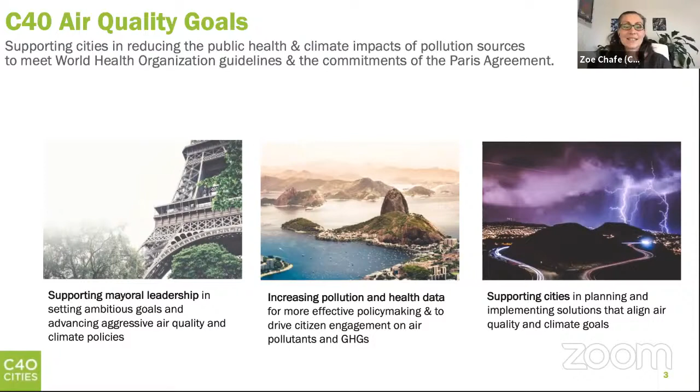I won't have time to go through all the details, but fundamental to signing this declaration is the commitment to establishing air quality goals and meeting WHO air quality guidelines. We think one of the most important ways to do that is to identify the top sources of air pollution, develop control strategies, and use that to implement policies and programs. We've set a deadline of 2025 for the first evidence of doing that within our signatory cities. Then finally, to track and report publicly on progress towards meeting these goals.

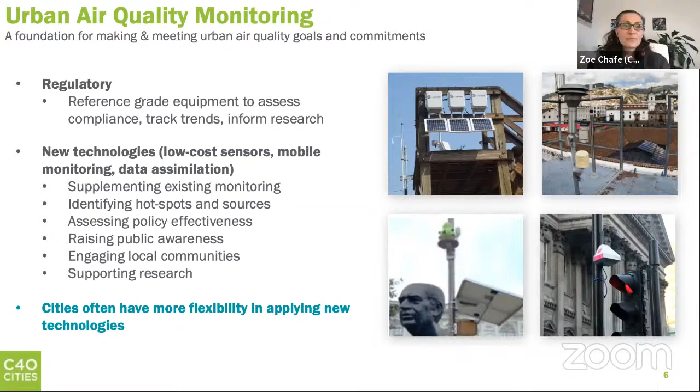I think that second category is the really exciting one right now, especially because we think cities often have more flexibility to apply these new technologies than other agencies or government groupings might. So what I'm going to do in the next few minutes is briefly present 4 different case studies of how cities are using these different types of monitoring techniques.

The first is a project called Breathe London, and the objective of this campaign was to collect really high resolution air quality monitoring data that can be used for policy development and evaluation. They used a combination of mobile monitoring, fixed site monitors, and personal monitors. That information is being used to inform the expansion of an ultra low emission zone in central London and to fulfill a mayoral commitment to increase local pollution monitoring.

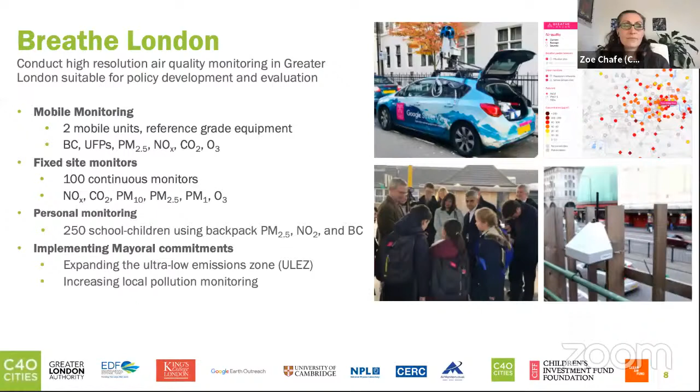The second project I want to highlight comes from Los Angeles, which is the Watts Rising Air Quality Monitoring Network. This is a unique partnership between the City of Los Angeles and community groups to create a hyperlocal air quality monitoring program in a historically underserved and overburdened community. It's using dense sensor deployments, somewhat like Breathe London, to advance community interest in hyperlocal air quality.

It's using some new low to mid cost sensor technology to provide insights really at a block by block level, something that regulatory monitors are just not equipped or designed to do. It's important to note that this program is really driven by community desire. The Watts community identified a need to deepen the community's understanding of local air quality, and the community group's feedback informed where the sensors would be placed. So this is an exciting new initiative.

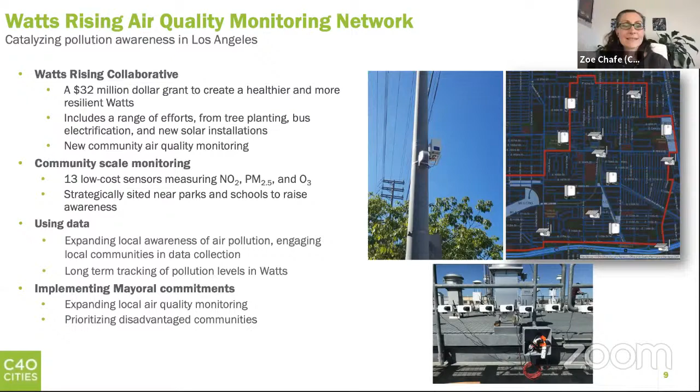The third example I want to highlight is from Quezon City in the Philippines. At C40, we're in the midst of a technical assistance program with Quezon City to help the city create a city-led air quality monitoring strategy. We're working with Clean Air Asia to implement part of what the city committed to in the Clean Air Cities Declaration, to establish a baseline of their air pollution levels. After the strategy is put together, the next step will be to deploy low-cost sensor networks to assess baseline levels and hotspots, which will then help the city take more effective action to mitigate those sources.

The last example is Copenhagen, where they've participated in a project to map black carbon and ultrafine particle pollution to identify hotspots and sources. This also supports the city's commitments under the Clean Air Cities Declaration, to electrify several modes of transport, to expand its low emission zone, and also to potentially introduce a zero emission zone. Data from this project can assist in evaluating intra-city trends, especially near vulnerable populations such as schools, daycares, and parks, and the city can use that information to inform its urban design policy.

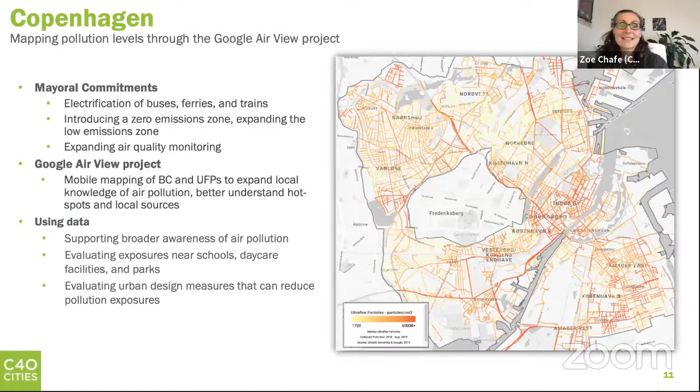So in summary, I think we see that air quality monitoring is a foundational piece of the way that we at C40 think about city commitments to creating better air quality and cleaner air. And with these new types of technology coming online now, cities have many tools available to support local action and also to assess their success in taking action. These types of technology are being applied across C40 cities to evaluate intra-city trends, identify hotspots, and then figure out what to do about them.

Important decisions in cities can be driven by data, and we see that partnerships are really important to pushing that forward, and that community engagement can both help design and also be encouraged by participation in these air quality monitoring projects. So with that, I will say thank you, and I am looking forward to your questions after the rest of the presentations.

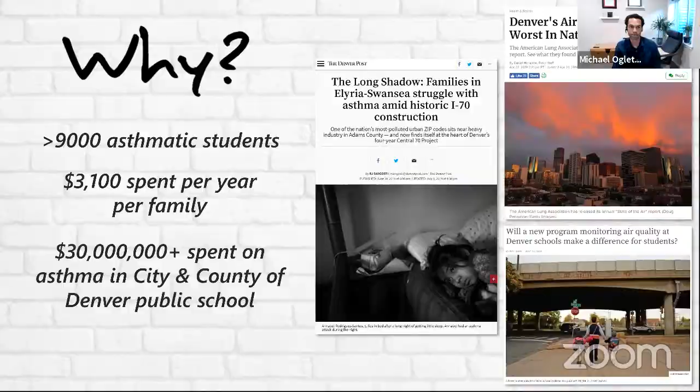So what we built was the Love My Air program. It was built around this why, and it was built in collaboration with communities. As we were thinking through how do we solve this problem of communities having access to data and using that data to better inform their decision making.

We had iterative focus groups with parents, teachers, and nurses to figure out how we solve this problem. What we came up with was deployment of an air sensor network at schools, coupled with a data platform to bring in the data from the entire network in one place, as well as reference instrumentation to correct that data and make it more accurate. Then, more importantly, we work with those schools to come up with strategies for mitigation of pollution.

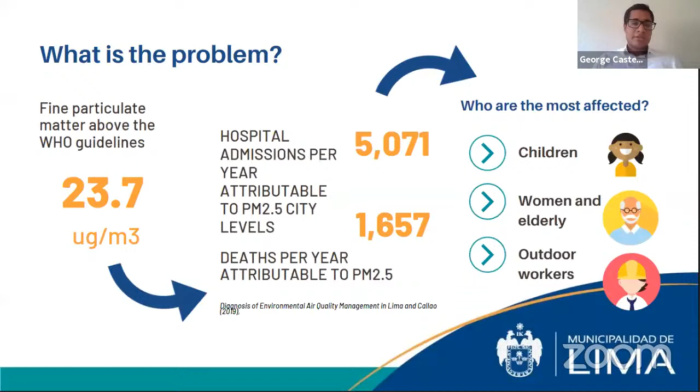The hospital admissions per year attributable to PM 2.5 city levels are more than 5,000. The deaths per year attributable to PM 2.5 are above 1,600. So the most affected people by the level of pollution here in Lima are children, women, the elderly, and also the outdoor workers such as construction workers, public cleaners, and others.

Another problem is the number of stations that measure the air quality in Lima. We have 43 districts here in Lima, but only 10 of them have reference stations that evaluate the air quality.

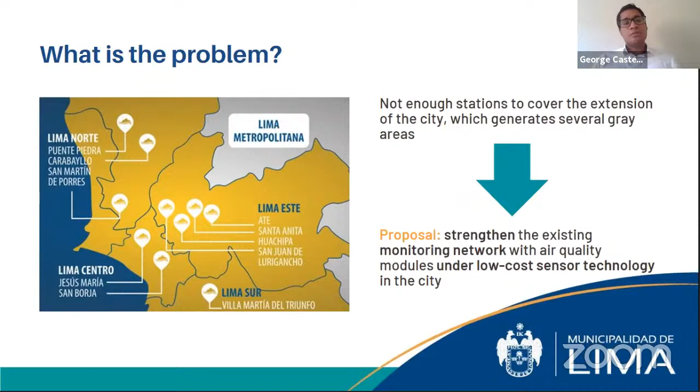So what we propose is to strengthen, to complement the existing monitoring network using these air quality modules that use low-cost sensor technology in the city. This technology is 50 times cheaper than a reference station.

This network is composed of 3 stages. The first one is an interinstitutional agreement with a startup called Qaira. This startup works with a university. We have an agreement with them in order to loan 10 of these low-cost sensor modules to put in different parts of the center of Lima. This is just a loan for 6 months. We just retired these 10 modules from Lima last December.

The second stage is with the help of C40, a climate leadership group that works with us as part of a program in which we acquire 10 more modules to deploy in the city. We are currently implementing these 10 modules around Lima City in order to put them in green areas, in the districts that don't have these models.

The third stage is financed by the IOARR project. This is financing from our municipality in order to acquire 20 more modules: 10 to replace the models from the first stage, and 10 more to complement the second stage. So I think by April of this year, we're going to have 30 of these modules around Lima.

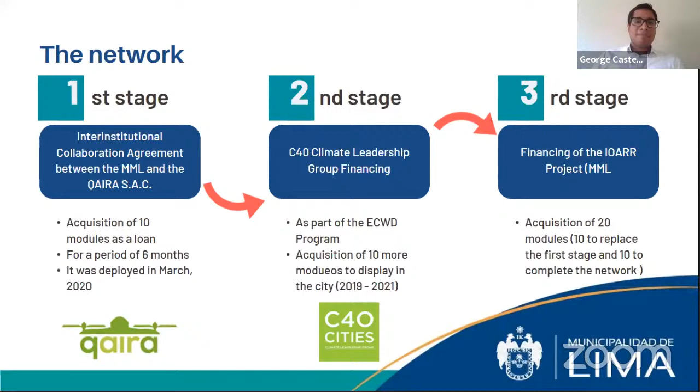We measure ozone and hydrogen sulfide. Additionally, we measure sound and meteorological parameters like humidity and temperature. We also measure UV radiation and pressure.

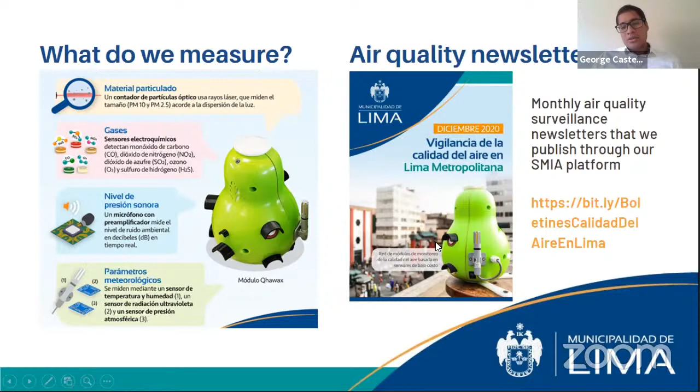Each month, we process the information and prepare newsletters to evaluate how good or bad the air quality was in the previous month. You can access this free information through this link to learn more about air quality.

So the topic is the challenges. One of the first challenges our network faced is how well the sensor performs in front of a reference station. With the help of the Ministry of Health here in Peru, we put 10 of these sensors just in front of a reference station to know how good or bad the performance of this sensor is. Currently, our national protocol for air quality prepared by the Ministry of Environment in Peru doesn't have a guideline or procedure to evaluate the performance of low-cost sensors.

So here in the municipality we prepared a document, a guideline for evaluating the field performance of this low-cost sensor. We received input from the US government, the EPA, the Pan American Health Organization, the South Coast Air Quality Management District, and other institutions. We prepared this document and use it to evaluate this sensor.

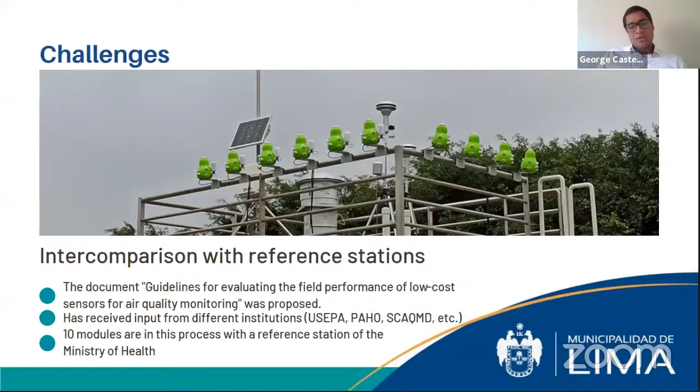So 10 of these modules are in this process with the reference station. We just finished the field part, and we're evaluating the results to understand how well these sensors perform.

Another challenge is preparing the people, for example the technical group working in the municipality of Lima that are developing this network. The challenge is how to prepare people in implementing this work, given that none of us have technical experience, because this is the first network of its kind in Peru and in Latin America.

So we traveled to different cities. For example, last year, just before the lockdown, we traveled to Mexico City and Sao Paulo in Brazil to meet different air quality networks and learn from them. Another group traveled to London to participate in a workshop organized by C40 in 2019, and also in 2020 in a virtual session.

So the final challenge we are facing is how to prepare our air quality network to last over the years. I don't know if this happens in other countries, but here in Peru the local government term is only 4 years, so after that, projects come and go.